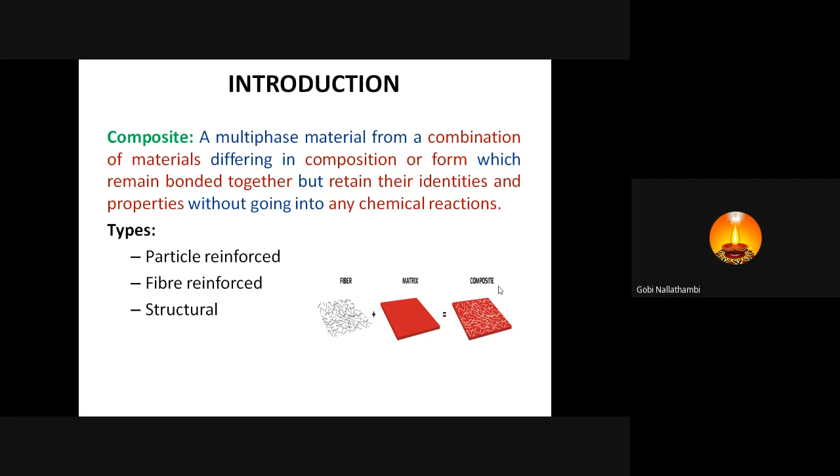Then because of making a composite, the property, particularly tensile strength, is higher. When we are measuring tensile strength for a material, that is measuring its stress-strain behavior, the matrix material has higher strain, that is elongation, but not much stress can be withstood by the material. But in case of fiber, it may have higher strength but lower strain. When we make a composite from these two materials, fiber and matrix, we will get equal strength and also the elongation property. So sometimes it is better than the fiber property.

But if you take a fiber, it is a flexible material. It is not a rigid material. So if you make a fabric, our fabrics are 2D materials. The third dimension is generally negligible because it is very, very low. We can easily measure the length of the fabric and also the width of the fabric. If you measure the thickness, that is very, very low. So it is called a 2D material in general. But it does not have a rigid material property.

So when you make a composite with the fabric and also with the matrix, then it will be a more rigid one, a stronger one, and it will have a definite shape. It may be a three-dimensional one. Instead of a two-dimensional material, it will be a three-dimensional one: length, width, and thickness. So that can be used for various technical applications. So that is the main difference between the material used as a fiber or a matrix or a composite.

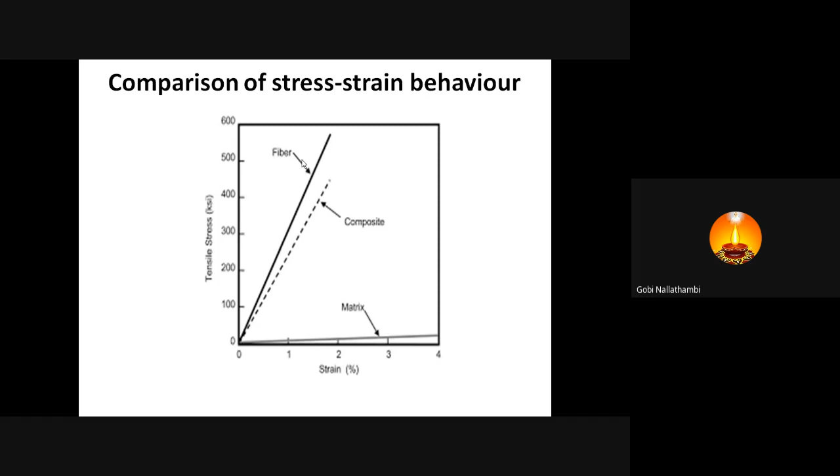If you use a matrix material for a particular end use, its property will be entirely different. It may have more elongation, but it cannot stand more stress given by the end use. So we have to go for making composites. So these are the various examples of composites: particle reinforced, short fiber, that is whisker reinforced, then continuous fiber reinforced composites. Then a cuboid or cubic material reinforced with various materials.

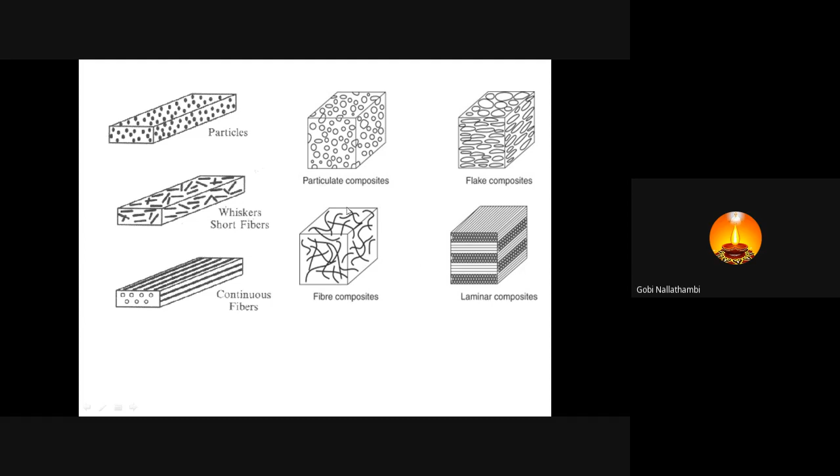So this is the development of composites from the early days. In ancient times, plywood and pottery are also called composites. Then in 1200, the composite bow was developed, and in 1800 synthetic resins were introduced. And in 1900, polyester and polystyrene were used. FRP, that is fiber reinforced plastics, made from glass fibers and unsaturated polyester resins. Then carbon fiber reinforced composites were also made for various sporting applications and also aerospace applications.

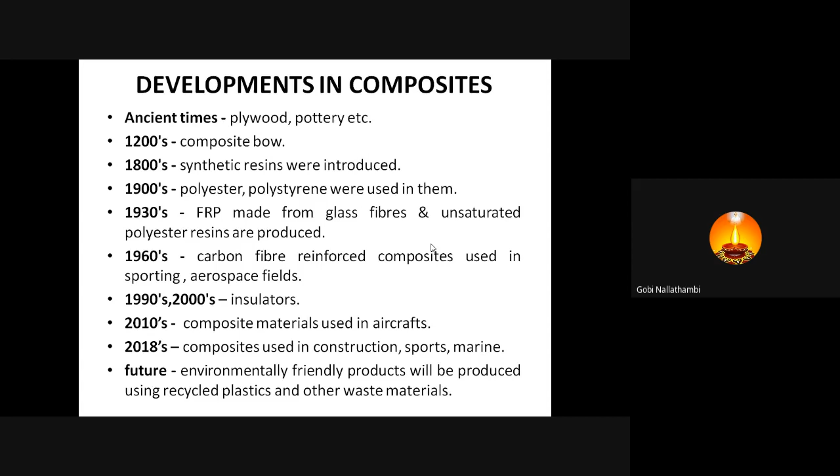Then in 1990 and 2000, development of insulators from composites. Then in 2010, composite materials are used in aircraft. And in 2018, composites are used in construction, sports, and marine applications. So now composites are developed from various recycled materials. That is the objective now, because a lot of waste products made from various polymers are now available to recycle to make another composite.

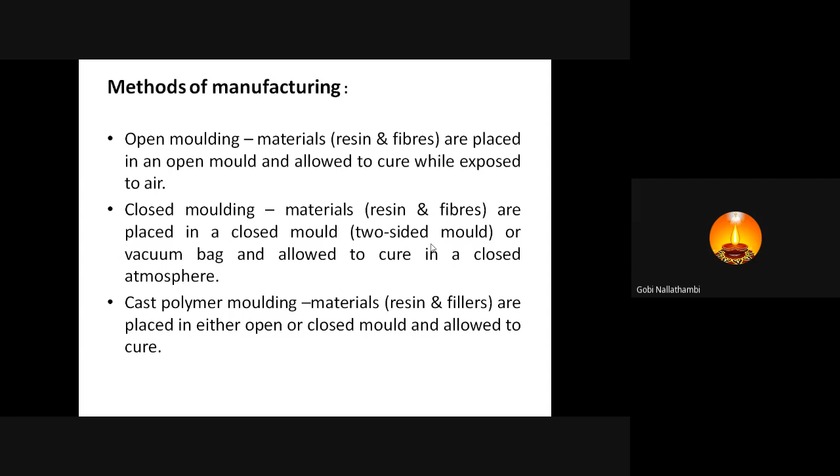So the types of methods of manufacturing composites are open molding, closed molding, and cast polymer molding. In open molding, the resin and fiber or particles are used in an open mold and allowed to cure while exposed to air. In closed molding, again the resin is the main component, and a fiber, a particle, or a mixture of these two are placed in a closed mold or a vacuum bag, that is the vacuum bag system, and allowed to cure in a closed atmosphere. Then in cast polymer molding, materials are placed in either an open or closed mold and allowed to cure.

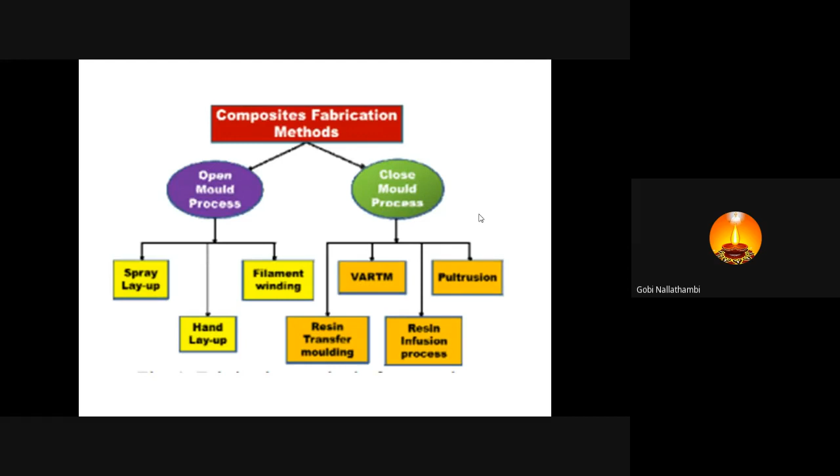This is the brief classification of composite fabrication. In the open mold process, there is spray layup, hand layup, and filament winding. In the closed mold process, there is vacuum assisted resin transfer molding, resin transfer molding, resin infusion process, and pultrusion. These are the various techniques used nowadays for making composites.

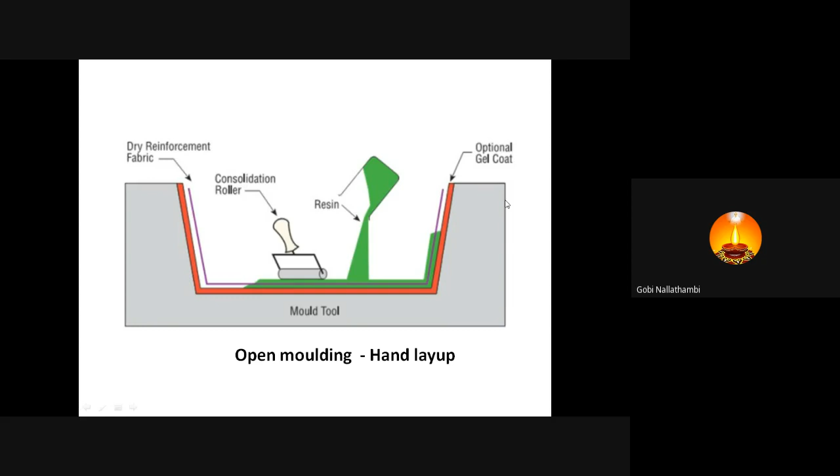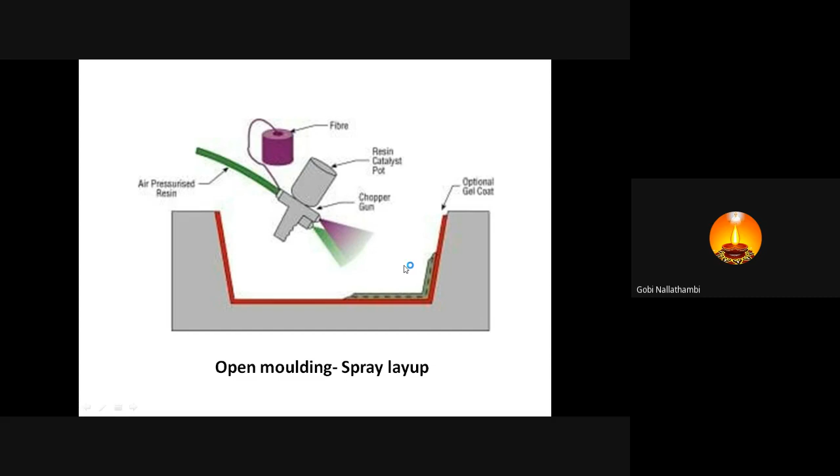So this is the principle of open molding, and it is the same kind, but instead of pouring the resin, there is a spraying of resin over a reinforcement material. Then after curing, it is taken out for the end use. It is called as a spray layup.

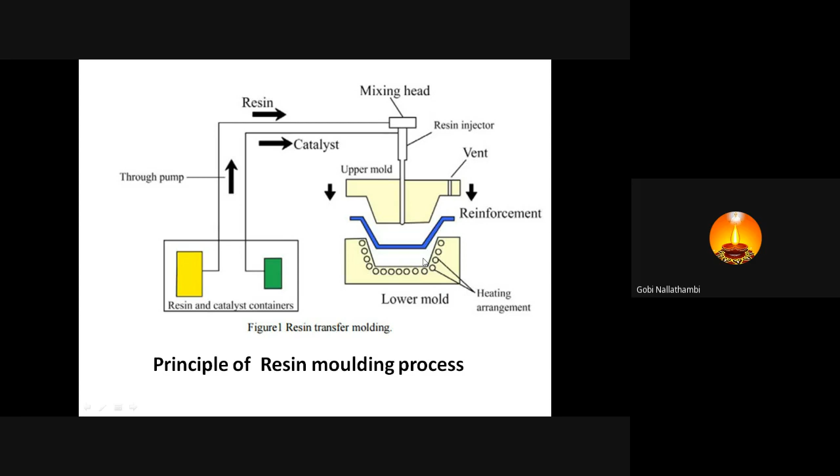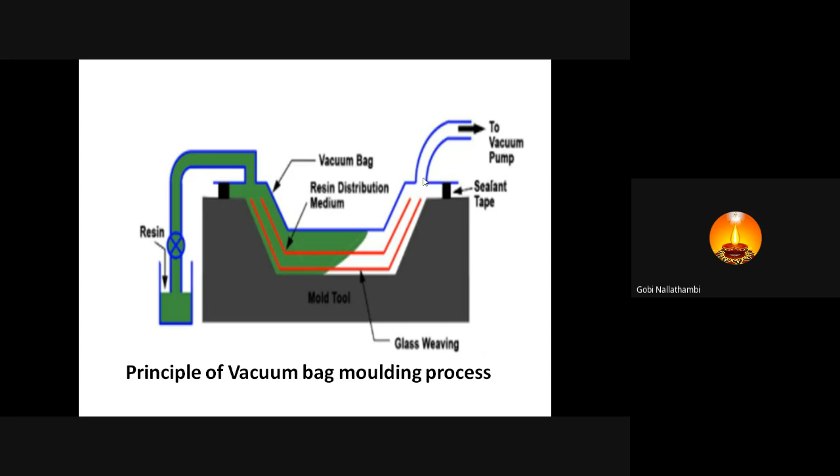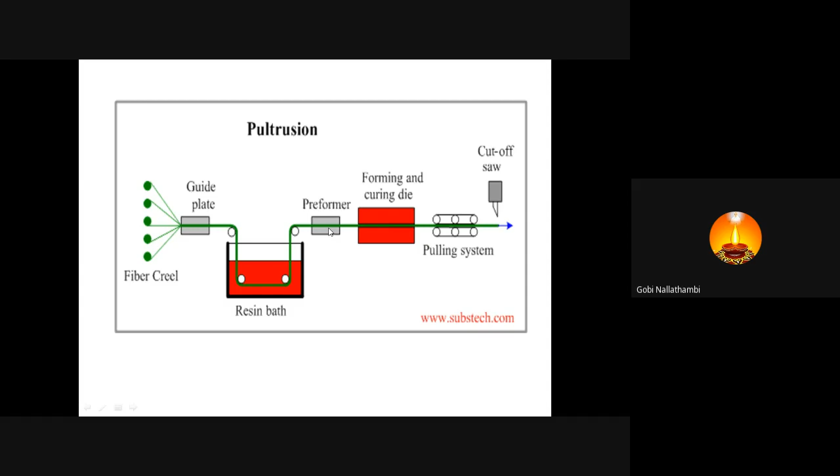So actually, there is a term called prepreg or preformer. That is, before curing, the material is called a preformer. Nowadays, in market, various prepregs are available. That is resin coated fabric. Then only curing process is pending. So whatever the shape we want, we can use that kind of die to make a composite. So this fabric may be placed over that die to make a particular shape of the composite. When applying heat, the resin present in that material is cured for a particular shape. Then we will get a product.

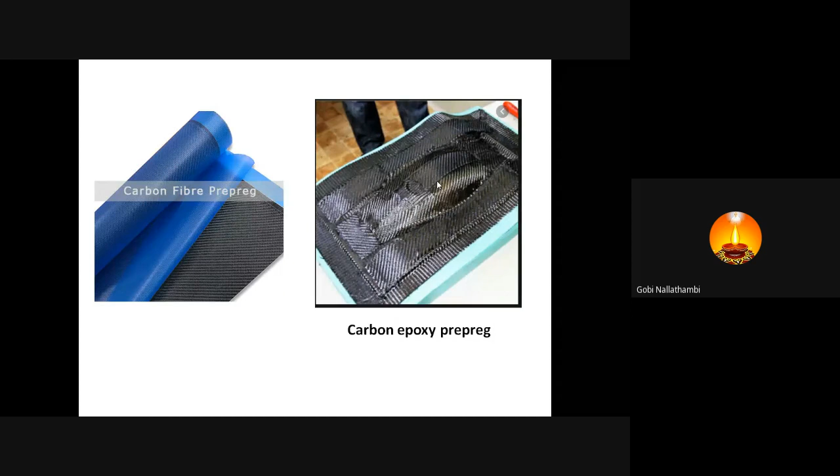So this kind of prepregs are now readily available in market. So based on our application, we can buy this prepreg. We can convert that into a composite. We can use that for our particular end use. Okay. So this is another one, compression molding process. Again, the prepreg is placed. Then final product we can get based on our shape of the die and also dimension of the die.

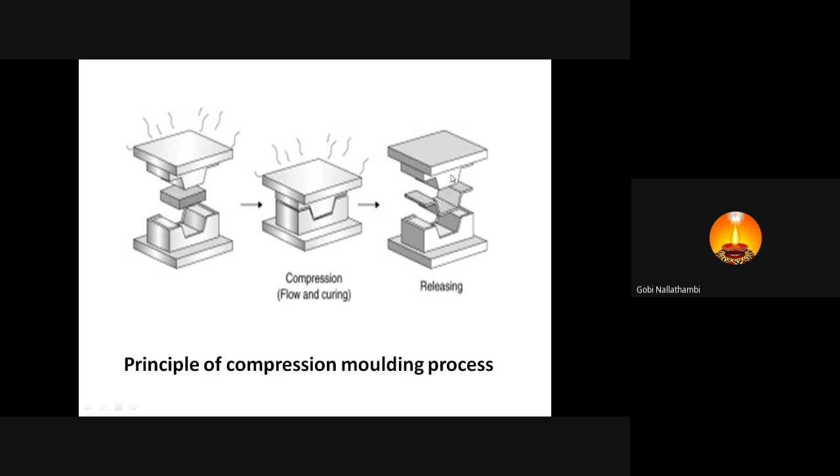So in our automobile industry, this kind of products are nowadays available in wide range for making various products. So the inner reinforcement cannot be seen outside. Only the plastic material can be visible outside. So in the textile industry and also in various automobile industries, this kind of composites are widely used nowadays.

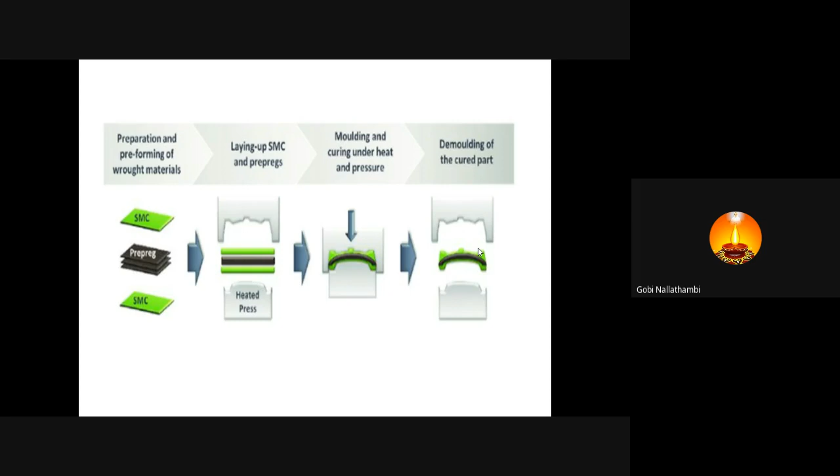So after making composite, the quality evaluation of composite is a very important process to ensure its performance with respect to particular end-use application. So basically, by making a composite, the impact, tensile, compressive, and the shear properties of the material are improved. So if you make a product alone, for example, making a fabric, we cannot get a rigid fabric because it is more flexible.

So when the resin is applied over the fabric, it will be more hard and more rigid. Then we can easily measure the impact strength and also the other properties.

So in this regard, various test methods are prescribed by ASTM, the American Society for Testing Materials. They prescribe a lot of standards for testing the properties of composite materials: impact resistance, moisture absorption, Rockwell hardness, flexural properties, specific gravity, defects in reinforced plastics, void content of reinforced plastics, tensile properties, fiber content, in-plane shear response, open hole compression strength, and compressive properties of composites.

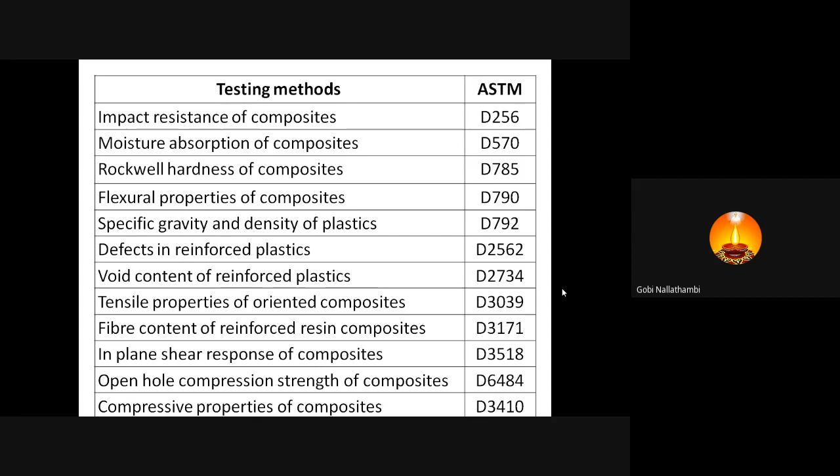So we need not test all the properties for our composites. Based on our application and based on our requirement, we can select the appropriate test methods. Then we can perform the test methods for the composite. Then we will quantify the results, and also we can ensure the quality of the product.

There are two methods used here: one is Charpy and another is IZOD. In Charpy, the sample is prepared and fixed in a clamp between the clamps. Then the force is applied, and then the breaking force is measured.

In case of IZOD, the sample is placed vertically. Then the force is applied via a pendulum to break the sample, and the resistance force is measured. So how much force the composite can withstand is measured here.

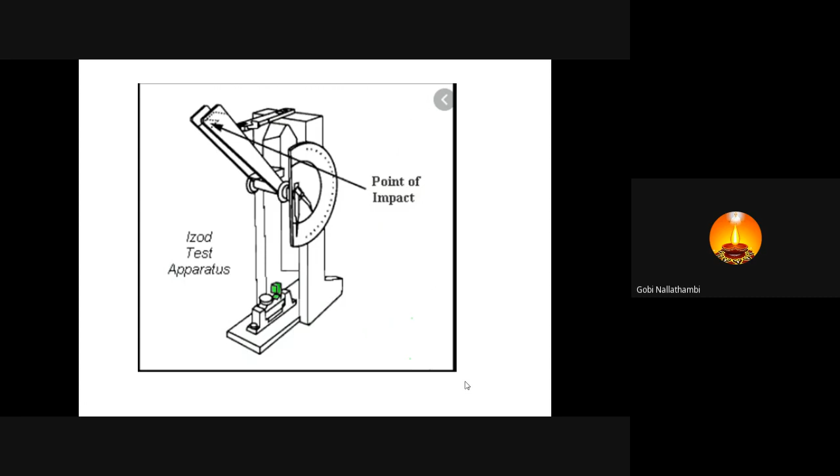Then another one is Rockwell hardness. The point is placed over a composite, then the force is applied. The force is divided into two parts: minor load and major load. Based on that, its hardness is also measured.

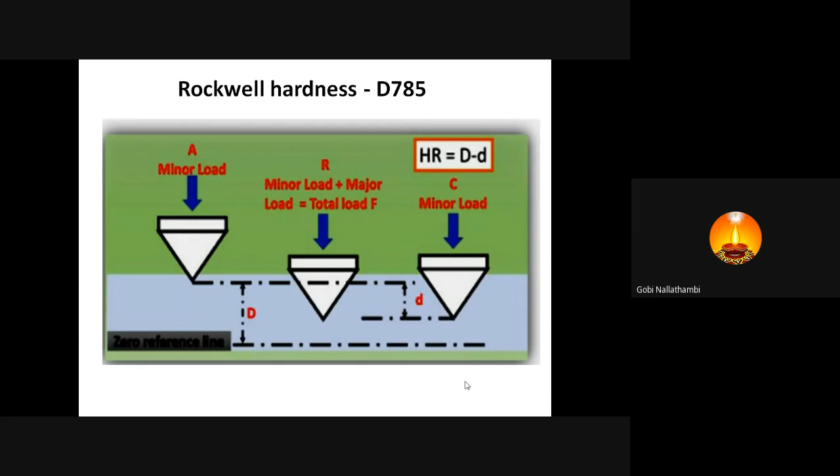Then flexural properties - how strong the composite will be, how long the composite can withstand a particular load and time, can be measured by this principle. There are two supports and the sample is fixed here to a described dimension. The force is applied at the center, then how long it stays in the same position, and whether there is any deflection or change in dimension, is observed. That shows the flexural properties.

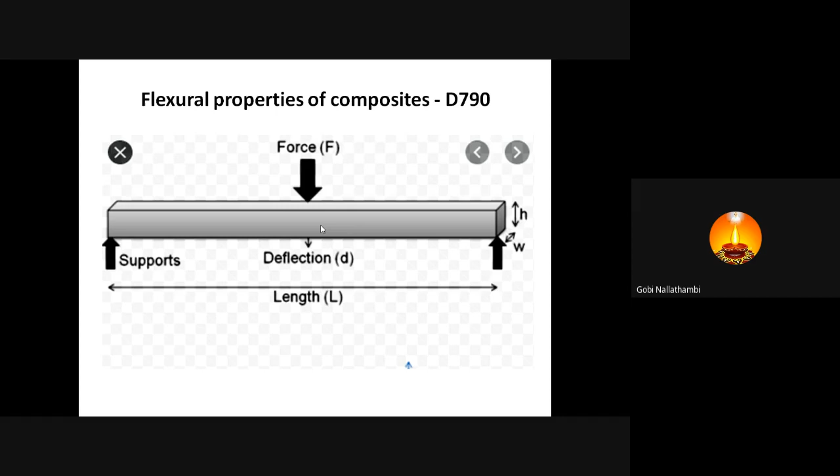So for assessing this performance, we can use a universal tester, which can be used for assessing the flexural properties. I'll show the diagram also.

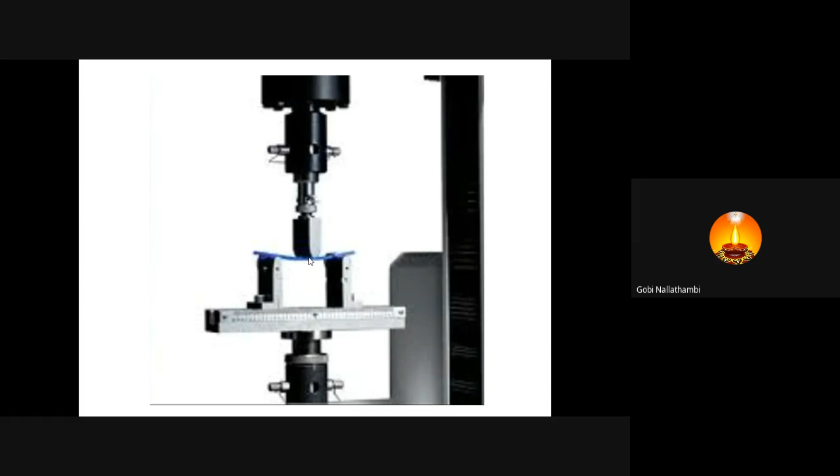This is the measuring part of the universal tester. Then there is a clamp, and the sample is fixed here. From the top jaw, there is a pointer or jaw that moves downward. So when the load is applied here, how long the composite stays in the same position, then how it bends and what force is required to bend it, is measured. Based on that, its flexural force or flexural property can be assessed.

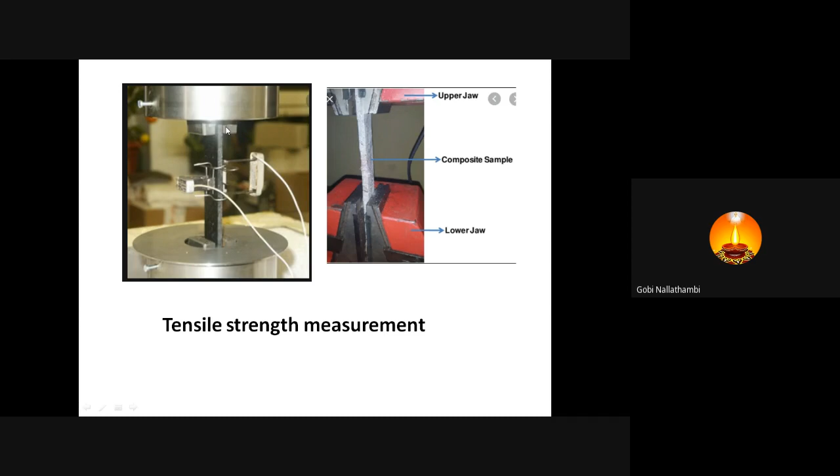So this is for measuring the tensile properties. It is also available in the universal tensile tester - just by changing the measuring head, instead of compression, we can change the head for measuring tensile strength. Then this is the composite, placed between the bottom and top jaw. Then the tensile load is applied, and the strength and elongation of the sample can be measured here.

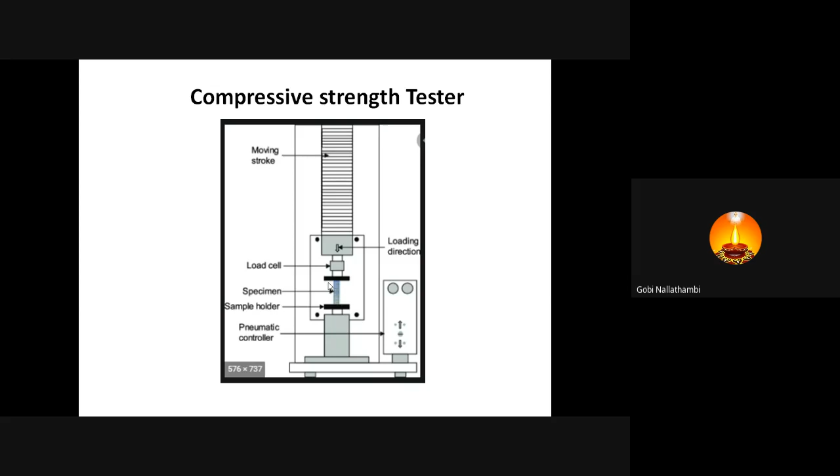And this is compressive strength, like flexural strength. The bottom jaw and top jaw are coming close together. Based on that, how much the sample will stand its original dimension, or if there is a change in shape, is observed here. Then there is another methodology for measuring compressive strength.

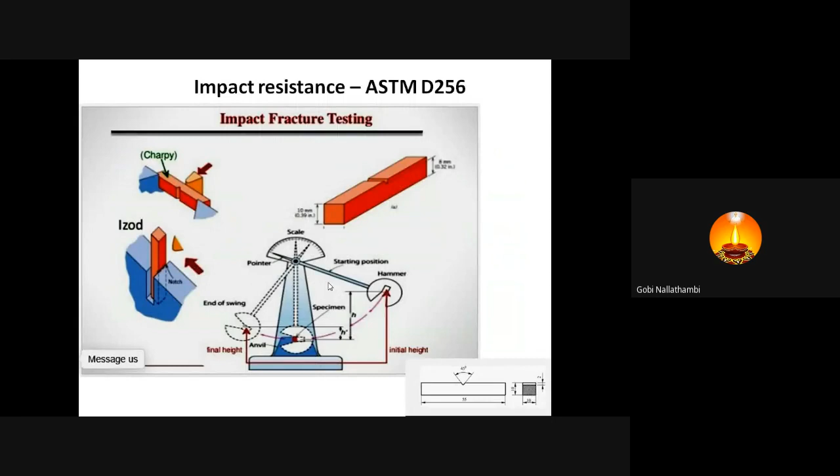Okay, so these are the various instruments and principles used for assessing the quality of the composite material. Now, the application of PET bottle flakes or bottle fibers for various composites. We can discuss the usage of PET flakes for various applications.

Initially, polyethylene terephthalate bottle flakes in combination with nano SiO2 are mixed to make a particular compound, for example for the application of...

For building construction, we can use PET flakes and also nano SiO2. These two can be mixed with a defined proportion to make a final product, mixed with the soil to make a particular part of a building, then we can assess the performance. Before using it in a real-time experiment, you can make a composite in a laboratory scale as a cube or small rectangle pieces for measuring its performance.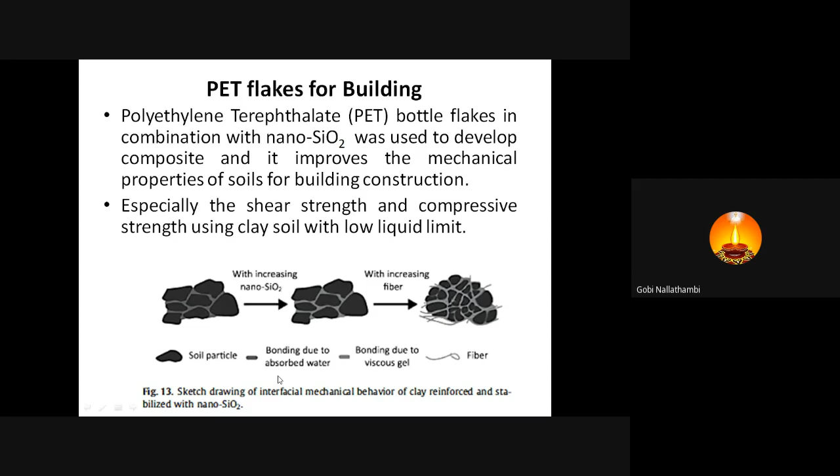Because of the fiber type material present in the soil, the property of the compound is better than the material which is raw stones and also cement. Then this is the kind of materials used for making the composite.

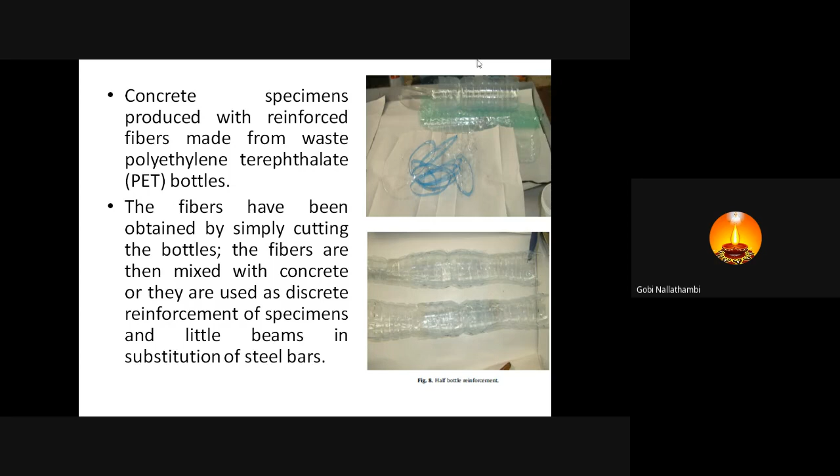Concrete specimens are produced with reinforced fibers made from waste polyethylene terephthalate bottles. The fibers have been obtained by simply cutting the bottles. The fibers are then mixed with the concrete, or used as discrete reinforcement of specimens and little beams, in substitution of steel bars. Instead of using steel bars, this may be placed in the concrete and its performance analyzed.

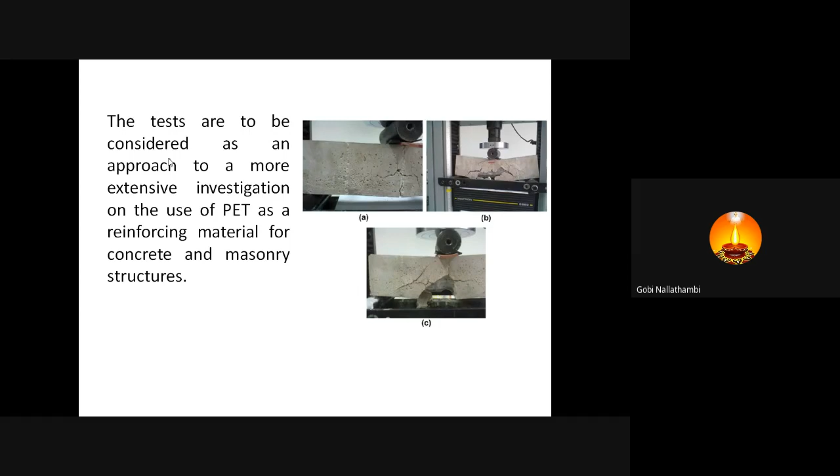So after making a small beam like this, its performance is analyzed. These tests are to be considered as an approach to a more extensive investigation on the use of PET as a reinforcing material for concrete and masonry structures. This is one of the examples for the use of PET bottles in construction material.

So instead of using a lengthy strip from the PET bottle, the PET bottle strips can be cut into small fibers or small strips. Then the effect of the strip can also be assessed by making a composite. This is called recycled PET bottle waste.

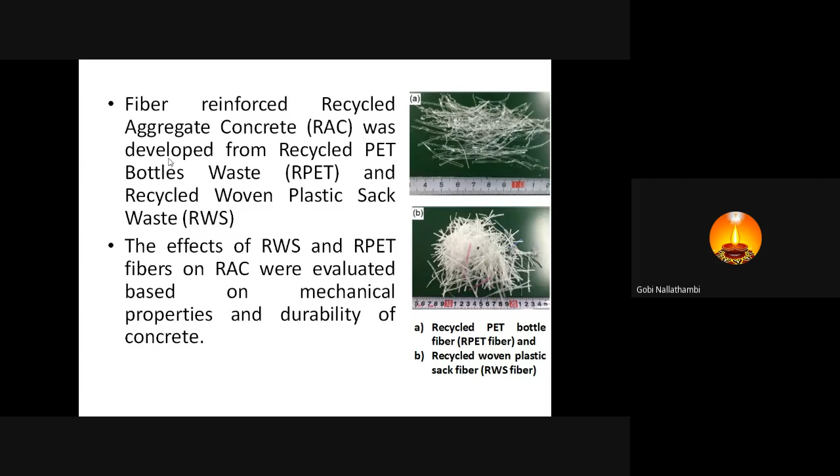Then there is recycled woven plastic sack waste. These two are mixed - one is recycled PET bottle waste and the other is recycled woven plastic sack waste - mixed in different proportions to make a composite, along with soil and cement. Then its performance is analyzed. These are the various composites made with different proportions of these two materials, and its performance is analyzed.

One important finding is it has very high alkali resistance. The tensile strength of recycled woven sack waste and recycled PET fiber, after 180 days of immersion in different alkali solutions, negligibly decreased about 0.07 to 0.6% compared to that at 28 days. So there is not much change in the property of the material after the samples are dipped in alkaline environments or alkaline solution for more than 180 days.

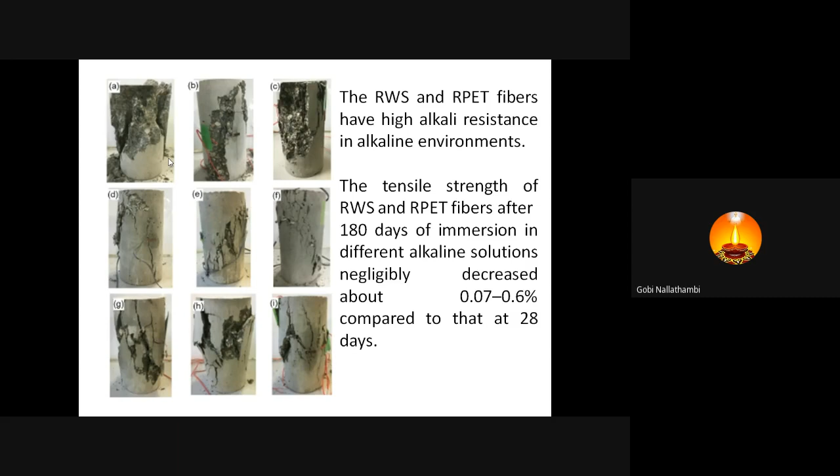This is another composite manufacturing from the recycled material process: short PET fibers. In this process they took 30% weight of PET fibers and 70% of PETG, milled PETG foils. PETG means polyethylene glycol co-1,4 cyclohexane dimethanol terephthalate. That foil is taken as a matrix for manufacturing composite reinforced with the short PET fibers.

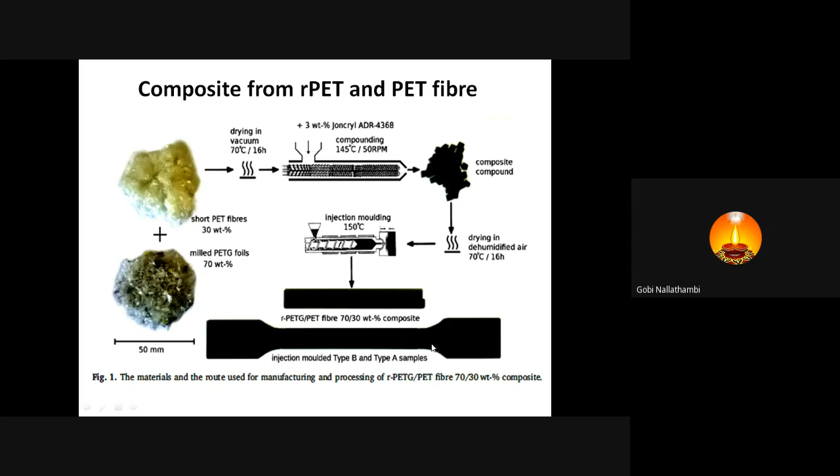These two are mixed in different proportions - here they took 30 and 70 - then dried in vacuum, then placed to make a preform. This preform is then passed through injection molding to get a final product. This is the final product, and this is the dimension or shape used for measuring its tensile property.

So the 70-30 filling ratio is notched. Impact strength of 12.8 kilojoule per meter square is twice higher than the native PETG, six-fold higher than the RPETG. So instead of using them independently for making composite, performance is lower. When these two are mixed in the 70-30 proportion, the composite performance is twice that of PETG and six-fold higher than RPETG.

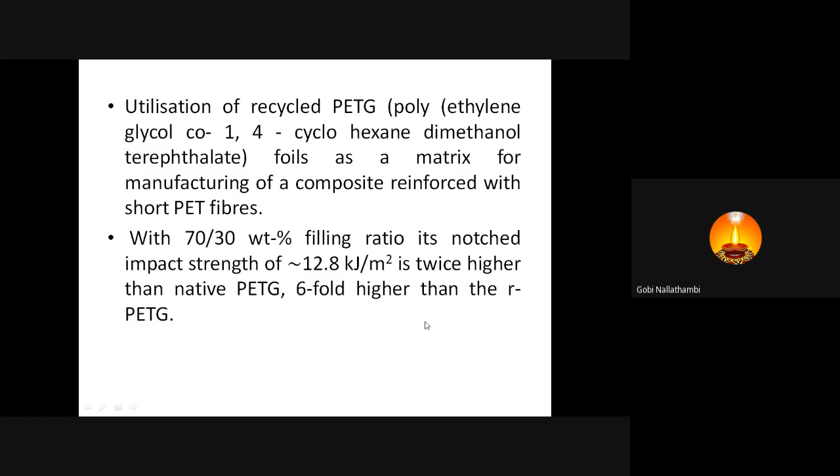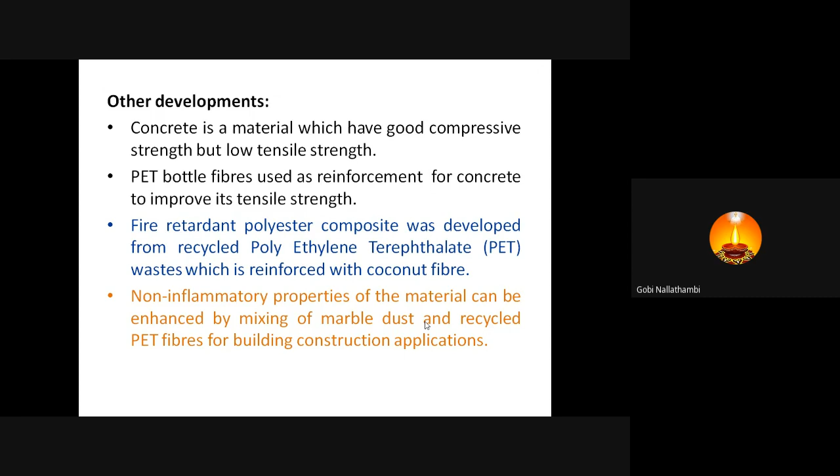There are some other developments in making composites from PET bottles. In concrete material, we can mix PET bottles as a reinforcement material to improve its tensile strength. Then for making fire retardant polyester composite, recycled PET can be mixed with coconut fibre to make a composite. Then non-inflammatory properties can be enhanced by mixing marble dust and recycled PET fibers for building construction applications.

So in my research, we have developed a composite with PET bottle flakes and recycled PET fibers, with a little proportion of epoxy resin. The composite has very excellent tensile and compressive properties.

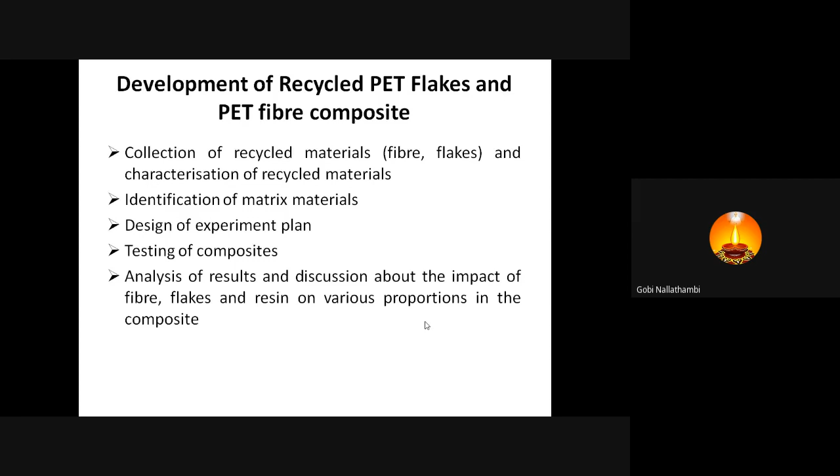In our project, we initially collected recycled fibers and flakes. Then the basic raw material properties were analyzed. Then we planned an experiment, and after making the experiment, we assessed its performance for various properties.

The raw material is PET flake. A lot of manufacturers are available in Tamil Nadu producing PET flakes, but they don't know how to use these flakes for product making, so they export the flakes to other countries. The available flakes have a length of approximately 1.5 centimeters, width 1.2 centimeters, and thickness 0.113 mm on average.

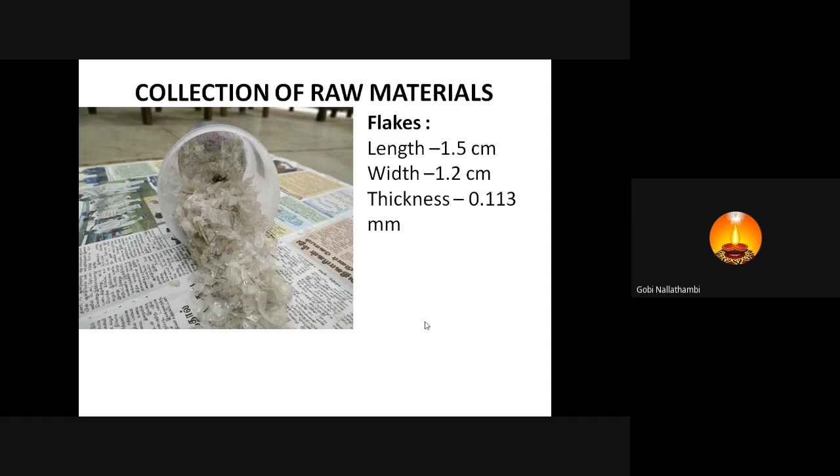This is recycled fiber, which we obtained from Tirupur, where there are 2 or 3 companies producing recycled PET fibers. We bought some amount of fiber with a length of 36 mm and denier of 4. Denier is the mass per unit length of the material, so thickness and length may vary depending on the denier. This is an important parameter which influences the property of the composite. Here we used 4 denier filament and 36 mm length fiber.

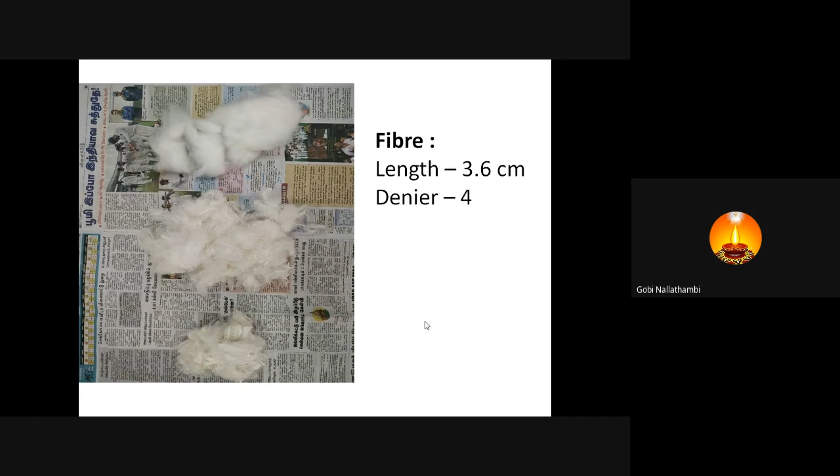The resin used is araldite with a suitable hardener. This is our methodology for making the composite: PET flakes and resin, PET fibers, with our targeted GSM (grams per square meter) of 225.

The flakes proportion varied from 30, 40, 50 and 60. PET fiber proportion also varies from 30, 40, 50, 60. Resin is 20 or 30. Our idea is to minimize the utilization of resin and maximize usage of flakes and fiber for making the composite.

With this range of parameters, we developed 15 experiments, with sample size of 15 by 15 centimeters and thickness of 1 centimeter. So 1 centimeter thickness, 15 centimeter length, and 15 centimeter width - small boards developed from this material.

Then we assessed the various properties. The recommended calculated quantity of flakes, fibers and resin are taken, and these three are mixed by hand mixing principle, then placed in a die.

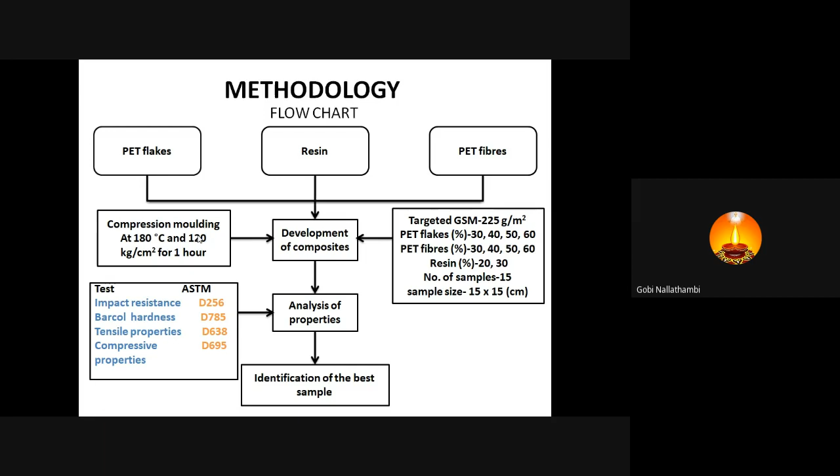The die is placed in a compression molding machine. We maintained 180 degrees Celsius temperature because the curing temperature of the resin is 180, and applied pressure of 120 kg per square centimeter for 1 hour. Then we get the product - this is the combination of various process parameters to produce the sample.

For example, out of 100%, 40% flakes, 40% fiber, and 20% resin is the first sample. If the weight of the sample is 100 grams, that's 40 grams flakes, 40 grams fiber, and 20 grams resin. We aim to produce a sample with 225 grams per square meter, so proportionately we take the required quantity of flakes, fibers and resin.

These three are mixed. We want to know the effect of varying the proportion of flakes, fibers and resin, so we varied the proportion instead of using only 40 - using 30, 50, 60, and for resin 20, even 70, 80, and 10. Samples 11 and 12 have only flakes and resin with no fibers, and samples 14 and 15 have only fibers and resin with no flakes, so we can know the effect of flakes and fiber on the composite property.

So we prepared samples without fiber and also without flakes. After making 15 samples, we tested the properties. This is the sample manufacturing process.

Initially we have to clean the flakes because of natural contaminants like dust particles. We do soap wash, warm wash, and cold wash for removing the dust particles deposited on the flakes. The fibers we bought from industry have small lumps in a more entangled state, so they are processed over a very small laboratory carding machine which fully opens the fiber, and if any trash particles are present, they are removed by the machine.

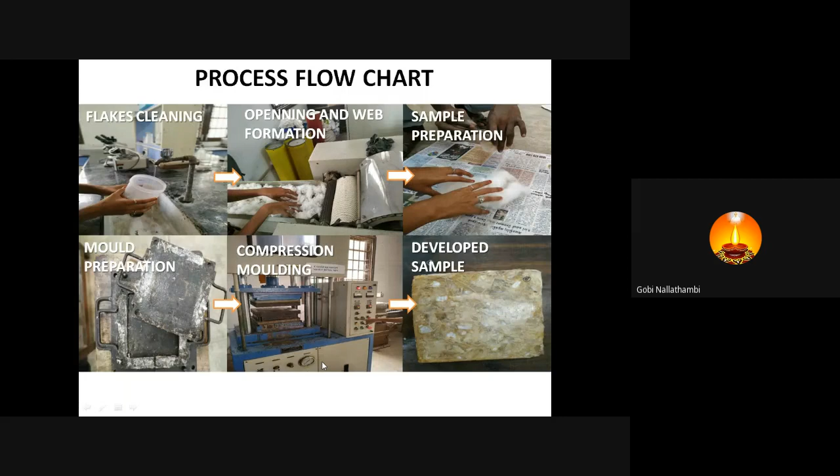So initially, the tensile strength is much more important, and also compressive strength. But for a textile material, we cannot measure compressive strength because of the buckling nature of the material. But when it is made as a three-dimensional one, we can measure tensile and also compressive strength. So in general, for textile materials like fiber, yarn, and fabric, we are measuring tensile strength and also elongation. That gives the life period of the fabric, how long it will be stable.

There is no change in shape of the fabric during usage, and while washing, whether the fabric is able to withstand the load given by the washing machine or the human being can be measured. So in general, the fabrics are over engineered than the requirement, but in case of making composite, we can specifically make the property for a particular end use.

Okay, this test measures the resistance of the material to a static or slowly applied force. A machined specimen, that means a prepared specimen, that is, we have to prepare the specimen as per the standard dimension prescribed by the ASTM standard, is placed in a testing machine and load is applied. The extensometer is used to measure the elongation of the specimen. The stress applied at the highest applied force is the tensile strength.

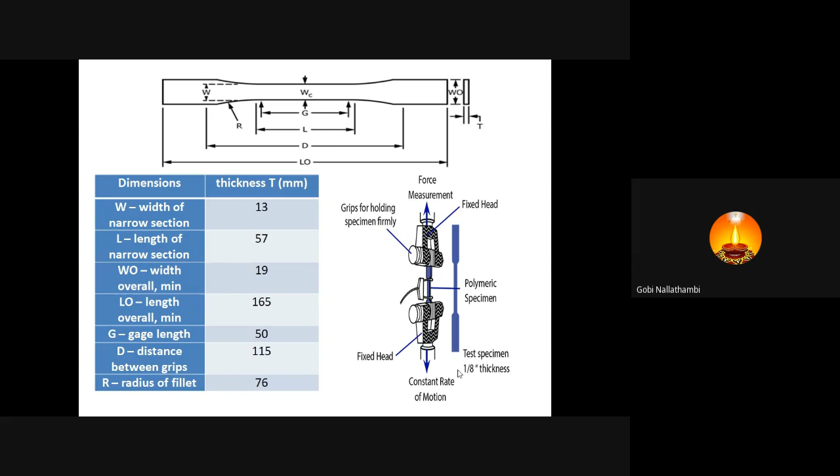So this is the principle diagram. We already saw this one. So this is the shape of the sample to be produced. This is a recommendation given by the ASTM to prepare the sample. So this sample is to be placed between the top and bottom jaw. Then the tensile force is applied in both directions. Then how much force the sample can stand is to be recorded, and also the elongation of the specimen. Okay. So based on this principle, our 15 samples are tested.

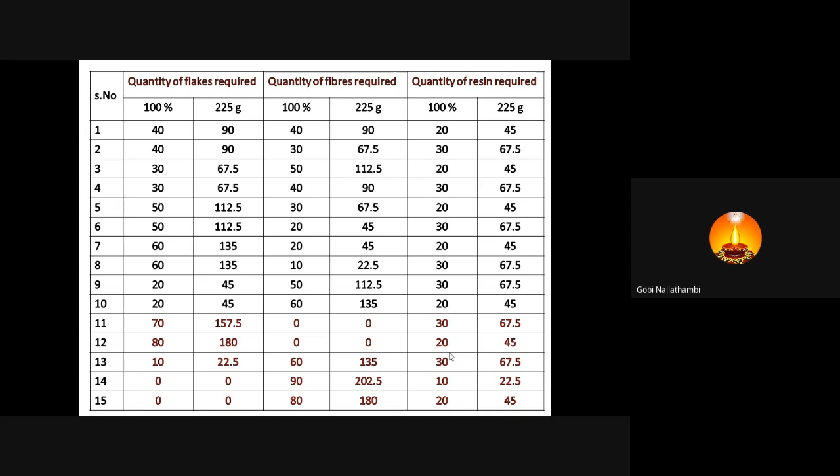So the optimum proportion for tensile strength is 3 and 9. If you see the flakes, resin and fiber proportion in samples 3 and 9, these two samples are giving higher tensile strength. But the same trend cannot be obtained with respect to other properties. There may be a different view.

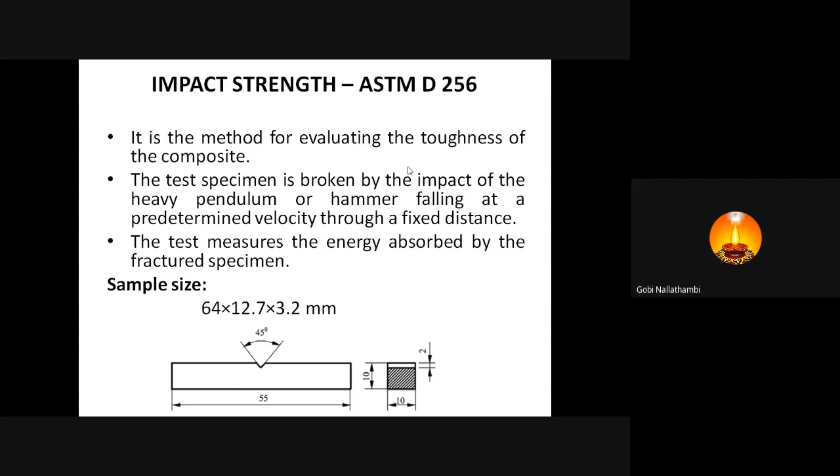So in case of impact resistance, by the Charpy or Izod principle, we can measure the impact strength of the sample. The sample preparation technique, we will know it. Then this is the principle diagram. So here we can see this notched sample will be broken like this or like this. Okay.

Okay, so then again compressive strength. There is a different unit here, that is the top jaw or top plate and bottom plate. Between these, the sample is placed, then the compressive force is applied, then the force withstood by the specimen can be measured. So with this, sample 7 is giving very high compressive strength. But in case of samples 13, 14, 15, it almost covers 1/4 of sample 7.

But samples 9 and 3 have very low compressive strength, while giving very high tensile strength. So because of the proportion of resin and also fiber and flakes, for a particular property, different compositions give different values. So we have to normalize all the properties to obtain a suitable sample. That is the task before us: identification of the suitable proportion to get optimum values with respect to all properties, not maximum values.

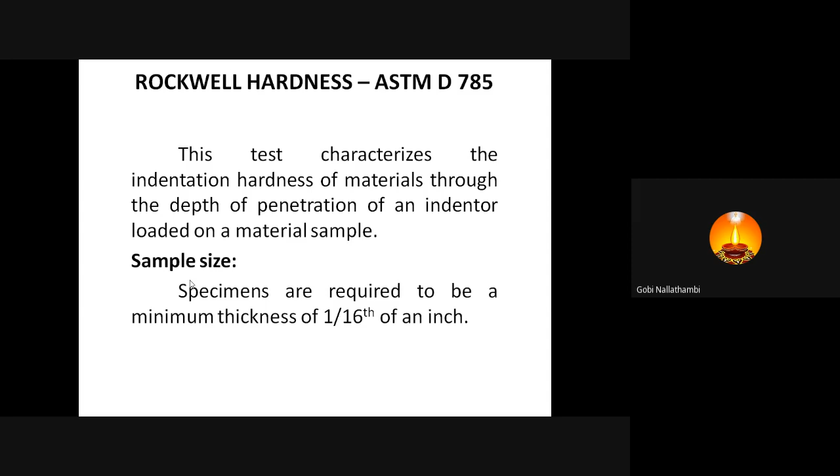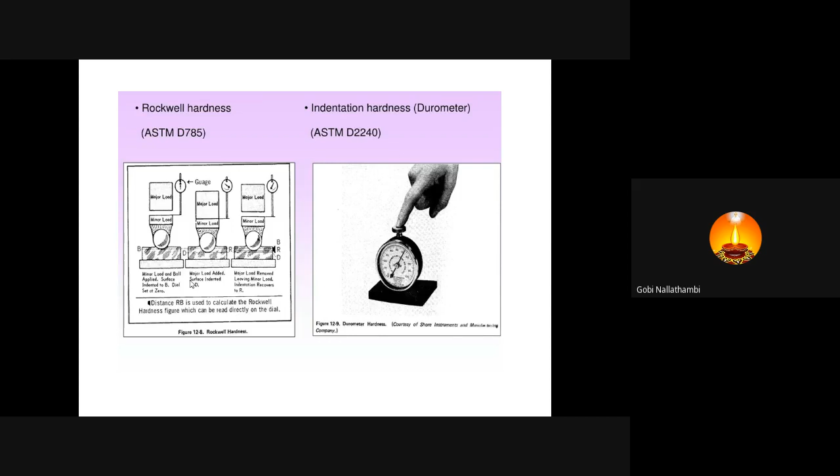Rockwell hardness as per the ASTM standard 785. This test characterizes the indentation hardness of the material through the depth of penetration of the indenter loaded on the sample. The principle diagram is already shown to you. So like that, we can measure the depth the indenter passed through the sample. But in our case, all the samples have very good hardness because we have flakes and fibers and also resin. There are no soft places on the surface. So all the samples are giving very good, more even hardness.

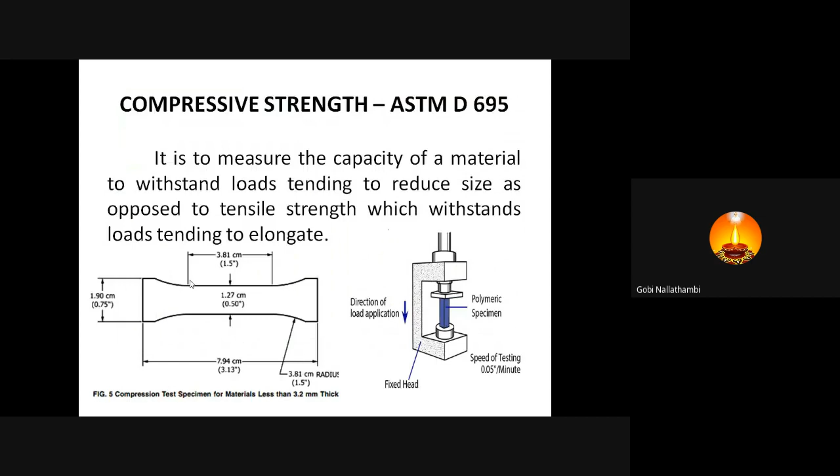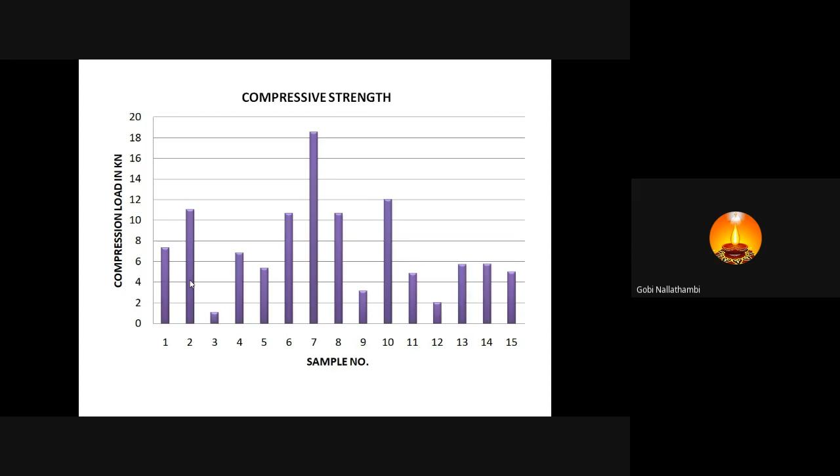Then, comparing all these properties, hardness, compressive strength, impact strength and tensile strength: in tensile strength, samples 3 and 9 give better values, and in impact strength, samples 13 and 15, and almost 5, 3 and 2 are giving the same values. In compressive strength, sample 7 gives the highest value. Then the hardness is almost the same for all the samples. Now we have to identify the best combination of process parameters which can satisfy all the properties.

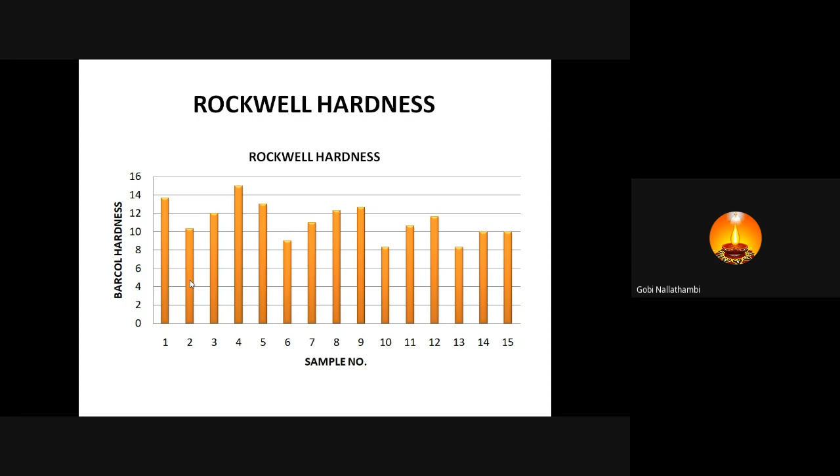So we have to go for some important procedure, that may be a quality factor. If you are using an experimental design like the Box-Behnken method, they also have a technique called desirability analysis. The Box-Behnken method comes under response surface methodology. In general, it uses 3 levels and 3 variables. With 3 levels and 3 variables, we get 15 combinations of process parameters, and we can prepare 15 different samples.

So after testing, here 4 properties are measured and the properties of each sample are different. So the optimization and identification of the best sample is the biggest task for us. But in experimental design by the Box-Behnken method, there is a term called desirability analysis. Through the software, we can analyze the sample properties to get the best sample or best combination of process parameters which will satisfy all the properties.

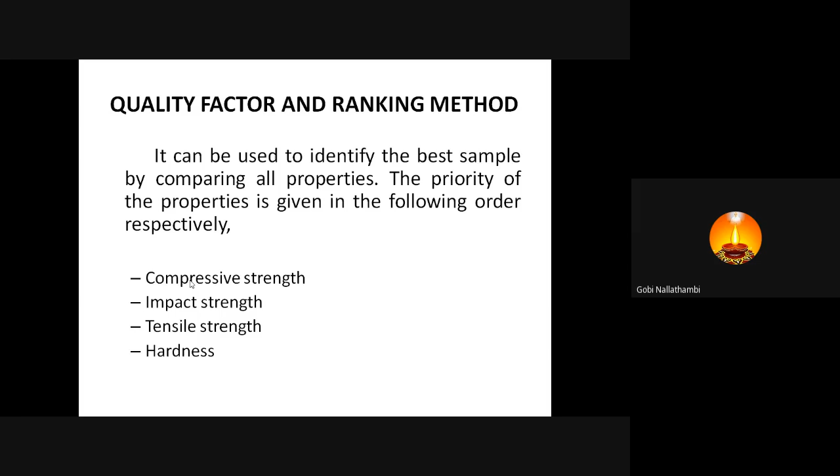But here we have not chosen any design of experiment like the Box-Behnken method. We just prepared different proportions, then prepared samples and got the results. So here we are using one methodology to find the best sample, that is the quality factor ranking method. To identify the best sample, we have to give weightage to the four properties measured: compressive strength, impact, tensile, and hardness.

So the weightage given for compressive strength and impact strength is similar, that is 0.3 and 0.3, and for tensile strength it is 0.25. But in case of hardness, it is 0.15, because the hardness values are almost equal for all the samples. But there is a huge variation between the compressive strength and also the tensile strength, even impact strength. So to obtain the best suitable input parameters, we have to give weightage for that property. So here the quality factor is derived by this equation.

We can also change this weightage based on our requirement. It is not necessary to maintain the same value. Based on the usage of the sample, that is the composite, for a particular end use, we have to give the weightage for a particular property. So suppose the sample is used where tensile strength is an important force acting on the sample, we can give higher weightage for tensile strength. Then we can modify this equation to get a quality factor.

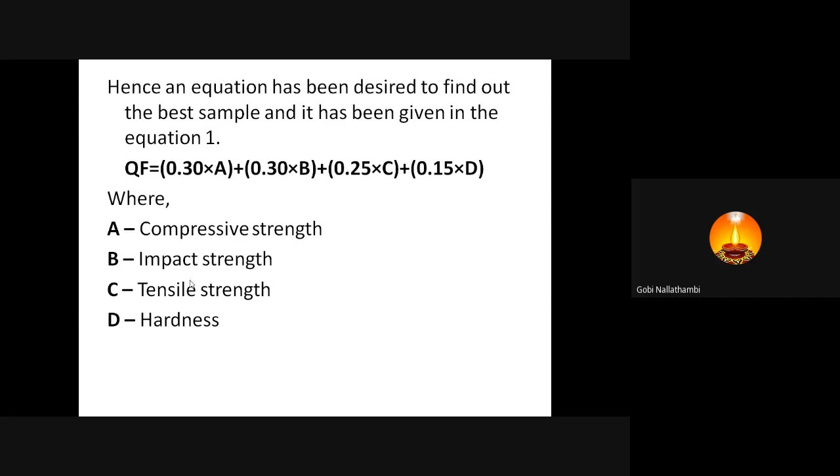Here we maintained a constant temperature, that is 180 degrees Celsius. Our objective is only to induce the curing process for the resin. We know the glass transition temperature Tg for the flakes and also fibers is around 80 to 85 degrees Celsius. Its melting point is 250 or 260 degrees Celsius.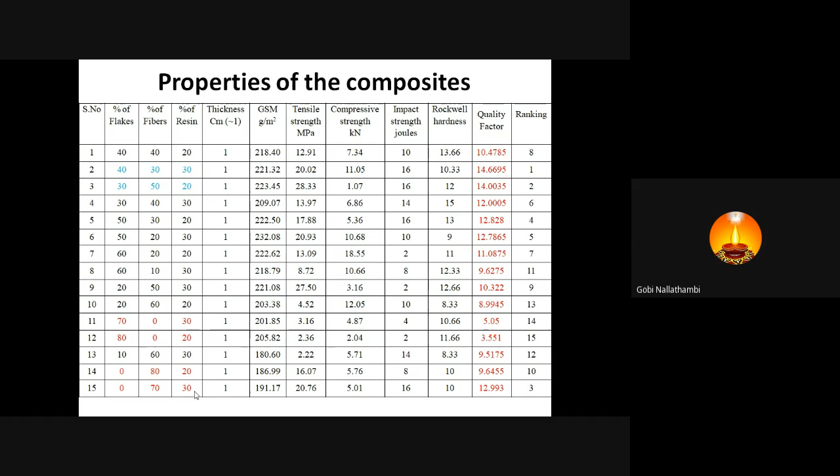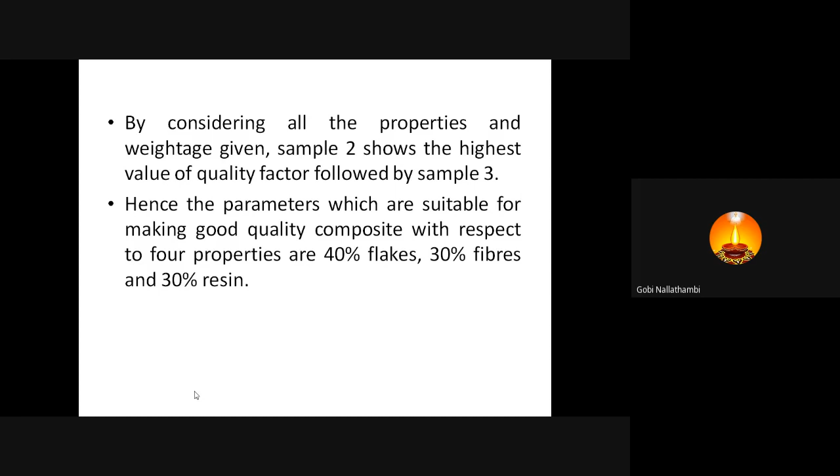By considering all the properties and weightage given, sample 2 shows the highest value of the quality factor followed by sample 3. Hence, the parameters suitable for making a good quality composite with respect to 4 properties, compression strength, tensile strength, impact strength, and hardness, are 40% flakes with the given dimension, 30% fiber, that is 36 mm fiber and 4 denier, and 30% resin. That gives the optimum property.

Okay, right. Recycled fibers and flakes are collected and characterized successfully. The experimental plan has been designed by varying the proportion of PET flakes and fibers and resin. 15 samples have been developed and the properties were analyzed, such as tensile strength, impact, compressive, and Rockwell hardness.

Samples 3 and 9 show the highest tensile strength among the samples. The increase in fiber proportion up to 50% and resin up to 30% gives the highest tensile strength. So this is the finding, that usage of fibers up to 50% can give better performance. Further increase will lead to a decrease in performance with respect to tensile property.

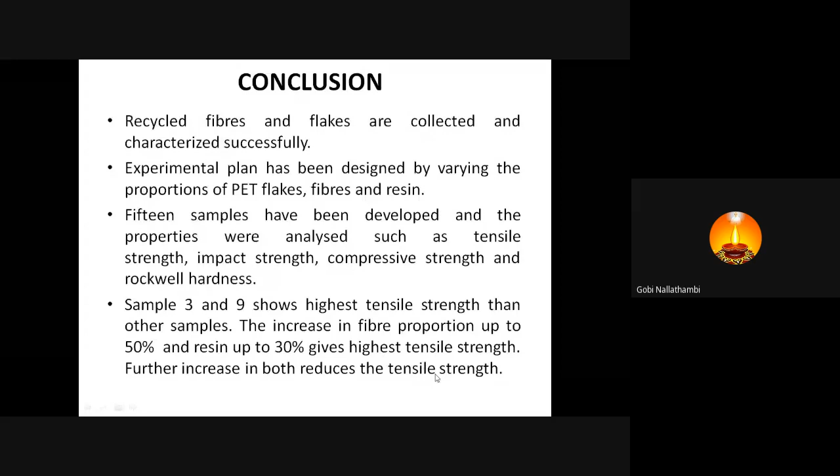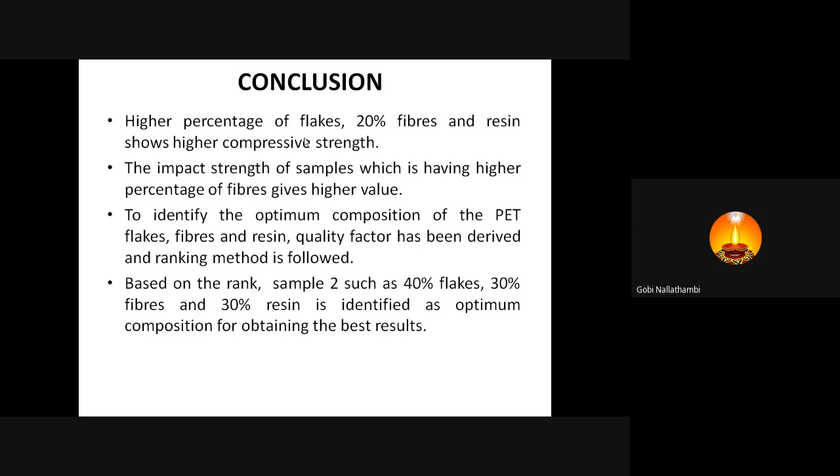Higher percentage of flakes, 20% fibers and resin shows higher compressive strength. The impact strength of samples having a higher percentage of fibers gives higher values. To identify the optimum composition of PET fibers, flakes, and resin, quality factor can be used. Then finally, 40% flakes, 30% fibers, and 30% resin gives the optimum composition, which gives better or optimum results.

Okay, so what can we do with this input in future? The dimension of the flakes plays an important role. In this research, we took 1.5 centimeter length, width, and also some thickness. We cannot change the PET bottle thickness, but the length and width can be minimized or maximized. So based on that, the impact of size of the flakes on various properties can be analyzed.

Okay, if you can minimize the size again up to 1 mm or 2 mm or 3 mm PET flakes, then those flakes can be mixed with the fibers and the resin to make a fiber composite. Then fiber parameters. Polyester recycled fibers are available in various grades, even continuous filament-like material and a very short staple length. Then by varying the length and also by varying the

denier. Normally the fibers used for making apparels are 1.2 denier, but in our project we used 4 denier filament. Filaments from micro denier, that is 0.8 and 1.2, up to 10 denier and 15 denier are available. So by varying the denier of the filaments and also by varying the resin parameters, even high temperature curing resin or low temperature curing resin can be selected based on our application.

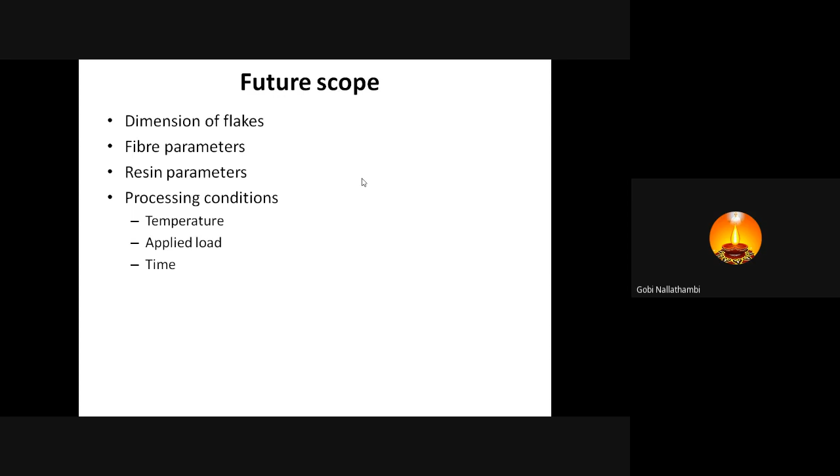We will come to very suitable and excellent composites from the recycled materials. These composites have excellent impact properties and also compressive properties. So we can use this for various high-end applications, making various machine parts, because there is no absorption of moisture by the material, and there is no change in shape when it is placed in water up to 100 degrees Celsius for a prolonged period. We also tested, but the results are not mentioned here.

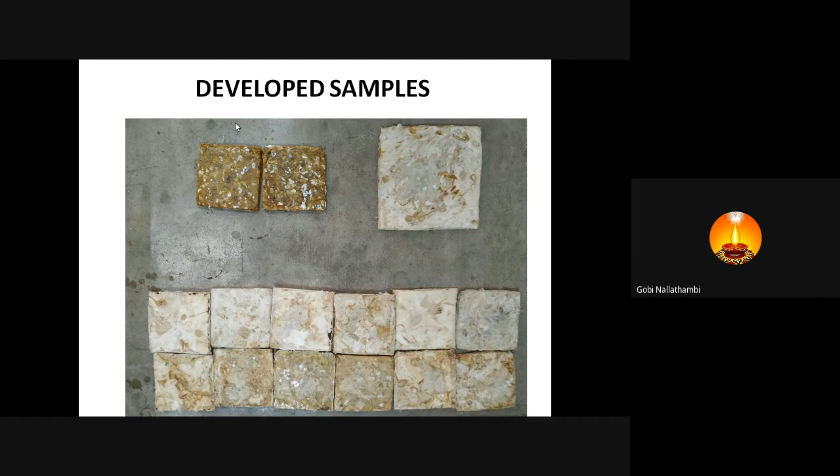We can convert this sample into various shapes, depending on our requirement. So instead of using metal or wooden parts, or even a single molded plastic, we can use this kind of material for the excellent properties of these composites. Even compared to a single PET or polycarbonate material, as a composite it will exhibit higher performance than the single compound material.